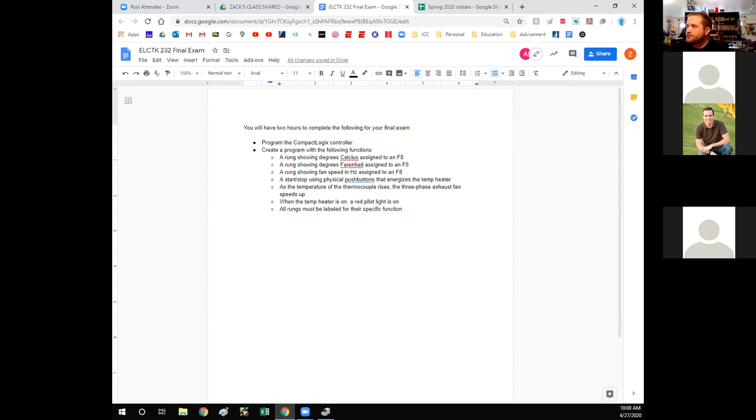Nothing technical wise. Do you have an idea of how we're going to schedule out when we're going to do the final exams though? No, I mean, I understand some of you are working, so I got to figure out which days we're doing it first, because I haven't heard when the official exam week starts. So I'll take into account if people have specific work schedules they need to work around, those people have first dibs. And then from there, we can either decide together or we can draw a name out of a hat. I don't really care.

And then we'll do it just like how we've been doing it in class, where you'll have control of my screen, and then I'll sit there and fall asleep while you're writing your stuff, and then you'll wake me up and say, okay, I'm done, and we'll try it out. And it's designed to have the same point value as if you had done all the labs. So that's what I'm going to base your grade on. If you accomplish X amount of tasks, then you get points for that amount. Okie dokie. And then the rest of your overall grade will be determined by your attendance and participation, all that jazz.

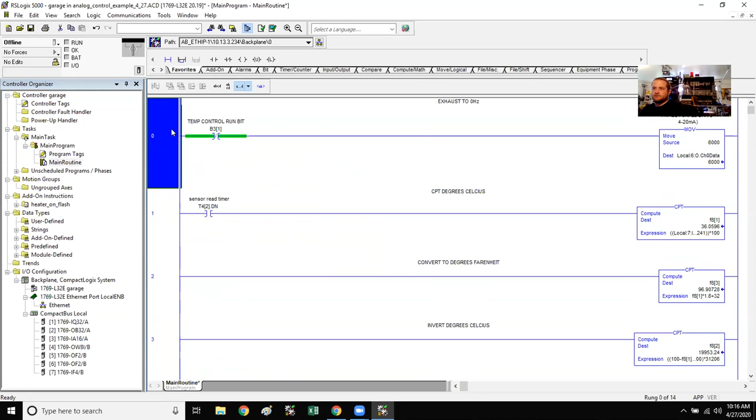Well, the first thing I need to do is I need to be able to control the pumps, right? So this processing can happen. So let's just use the selector switch for pumps 1 and 2. It seems like an easy thing to do. Say this is going to be selector left.

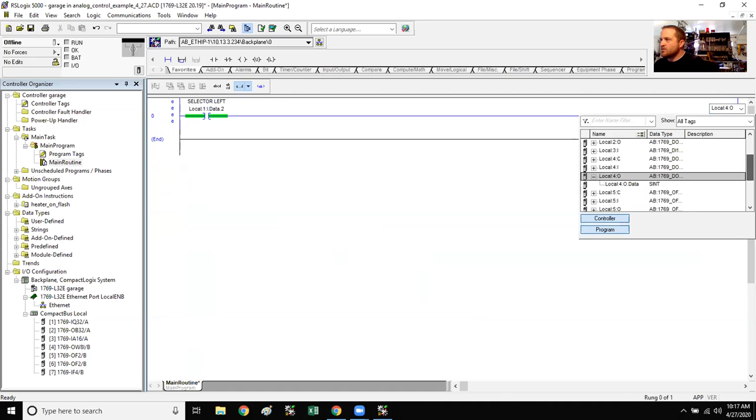And that's true. Left pump will energize for... selector right will energize right pump.

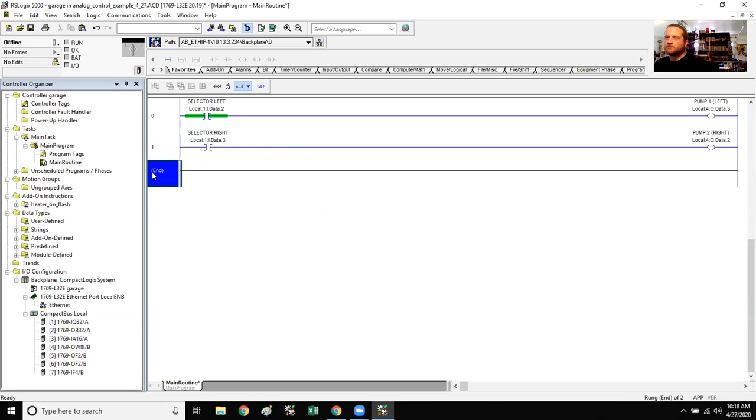All right, so we have a distance sensor, so we have an analog input. And as that number rises, we want the number for the analog output, which is going to be the 4 to 20 milliamp signal on the three-phase fan, to go up, right? So we're going to have a compute function.

And what other function are we going to need? What other type of instruction? Move. So what should we move? The value of the thermocouple.

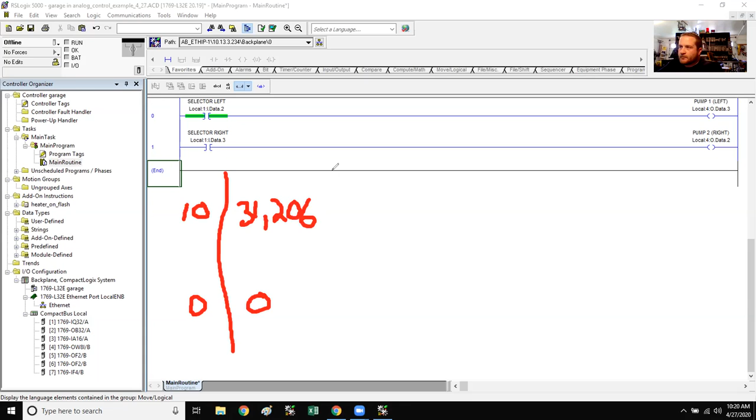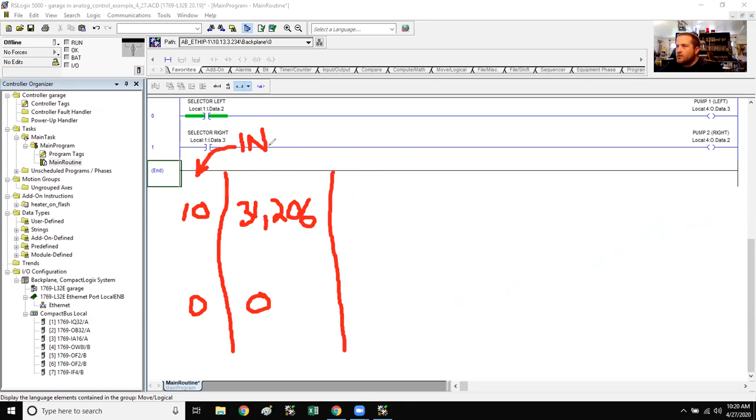What do we need to output to the VFD? 0 to 60 hertz signal? No. What is that drive looking for? A voltage? Nope. No, that's my two guesses, isn't it?

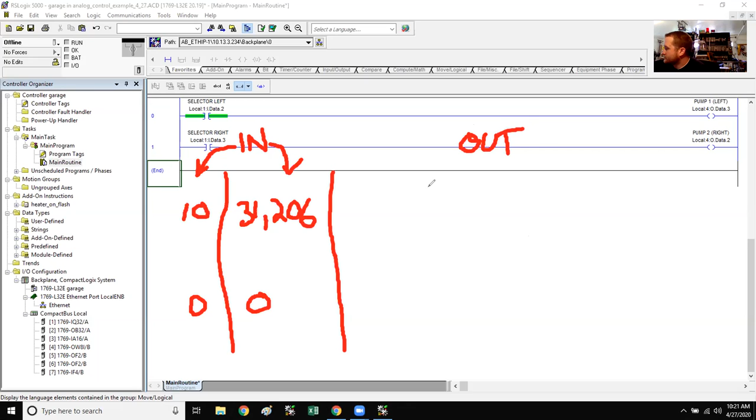6241 to 31206, you're right, but what is that? What is that PLC module going to send, signal-wise? Oh, 4 to 20 milliamps. 4 to 20 milliamps, we're going to output 4 to 20. Never mind, Jacob got it.

And those numbers are what? 31206 and 61, I don't know. And what? 6140, I'm pretty sure.

6241 to 31206, I believe. Yep. Is that right, Zach? Yeah, it is.

Okay, so that's what we need to do. Now we need to come up with the math to do it. So using this information, what instruction are we going to use?

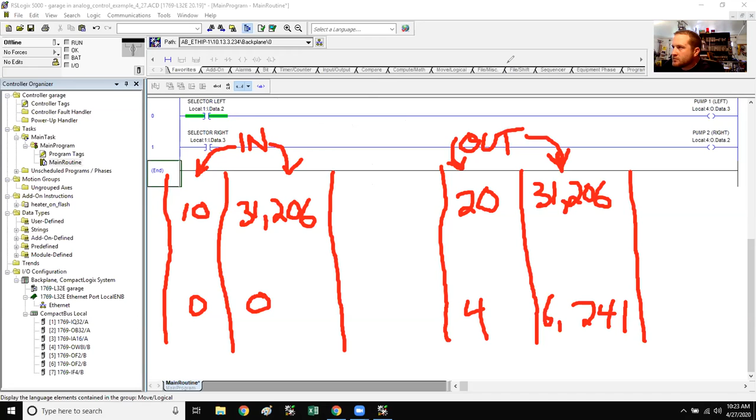Hey John, if you don't mind, could you mute yourself? Yeah, who's making all the noise? Tierney, how come you didn't mute it, kid?

Sorry, guys. You're good. So we're going to need a compute function. What are we going to compute? That's... I don't know.

4 to 20 milliamps into 6241 to 31206. You interpolate that so we can get that scale. We do need to interpolate. Yeah.

So we need to come up with a formula that's going to take one set of values and turn it into another set of values, right? Right. What's our first set of values?

We just had them written down. Is it the distance sensor? Yeah, the 0 to 31206. And the 6241 to 31206. Yeah, written down. It's just on another screen.

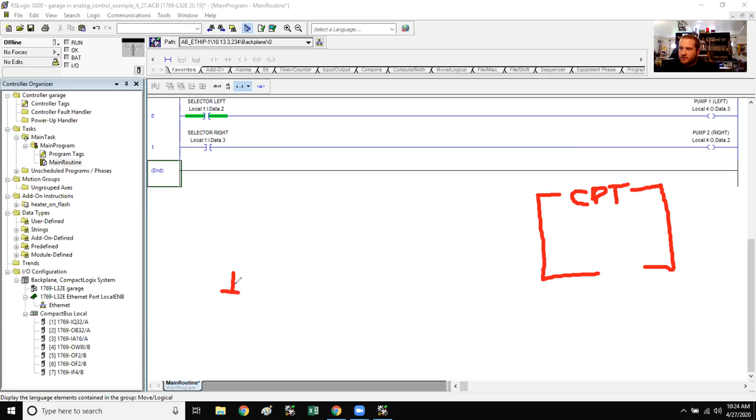All right, so if your input is a range between 0 and 31206, I'm just going to use the letter I to represent that. Whatever that distance sensor is reading is going to be this I, some number, right? What do we need to do with that number to turn it into a value that's...

31206 to 6241. Wouldn't it already be that number? No, because it's two different ranges. Oh, I'm so sorry, you were saying to go to the other one. You'd... let me look up the formula real quick.

Your input is going to be somewhere in here, right? Mm-hmm. We need to output somewhere in here. Are you looking for a simple answer, like interpolate, or are you looking for the formula? We need to interpolate it, yes, but we need a formula because we're going to have to put it into our compute function.

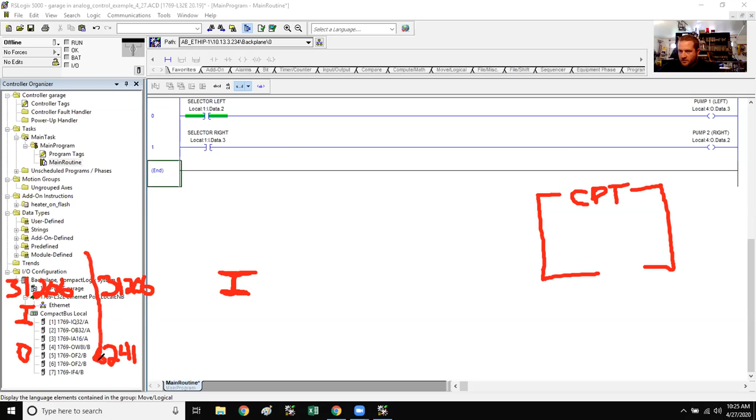So we'll take the distance sensor... well, yeah, you're already writing it down. So we'll subtract 31206 minus 0 and multiply that by whatever we're reading on the distance sensor.

Yeah, so basically we're going to take the first range, turn it into a percentage, and apply it to the second range, right? Yeah. So what is the percentage of the input going to be?

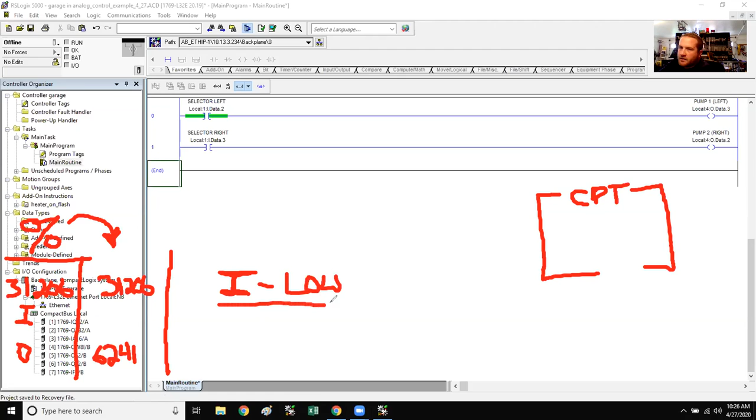Should we give you just a random number? No, just use the variable I for input. Oh yeah, the I minus the bottom number, divided by the high number minus the bottom number. Correct.

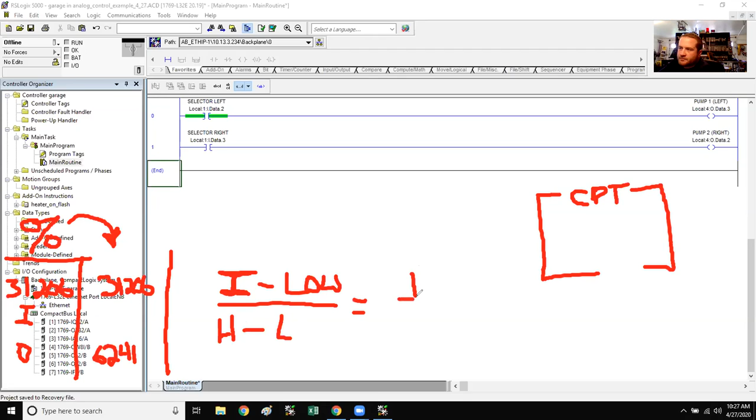Which ends up being just I divided by 31206. Right? Right. Yeah, so whatever that I would be, the distance sensor in this situation, divided by 31206.

That gives us a percentage. And we're going to apply it to the other range. So how do we do that?

Could you repeat that? I was writing stuff down. Well, remember, our whole goal here is to take this percentage of the first range and apply it to this range. So we have our percentage.

It's going to be the input divided by 31206. So how do we apply it to the second range? We would just add 6241 to whatever number we're getting. Eventually, yeah, but the first thing we do is multiply it times this range, right?

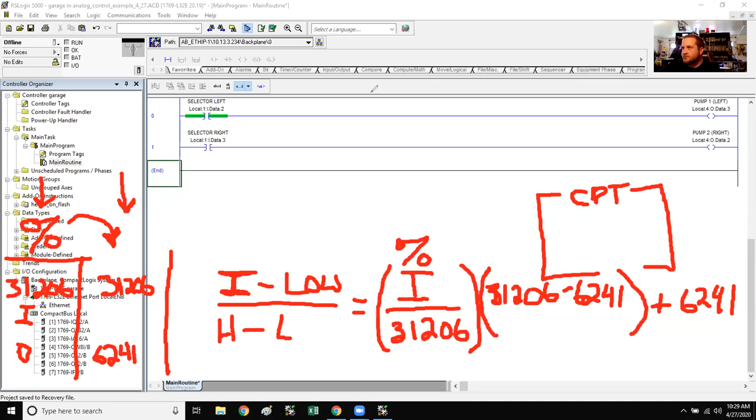Everybody get that? Mm-hmm. And then you just put that formula into the compute function, right? Yeah, and then set the destination to the F8. Yep, and then put that number into the variable frequency drive. Yep, exactly. Okay, so here's the formula.

And then we're going to take that number and assign it to an F8. We're going to take whatever that F8 is and move it to the output of the drive. Follow? Mm-hmm. Everybody good? Can I erase this?

Yes, going once. Yeah, I'm good. Would this also be... you can erase it still.

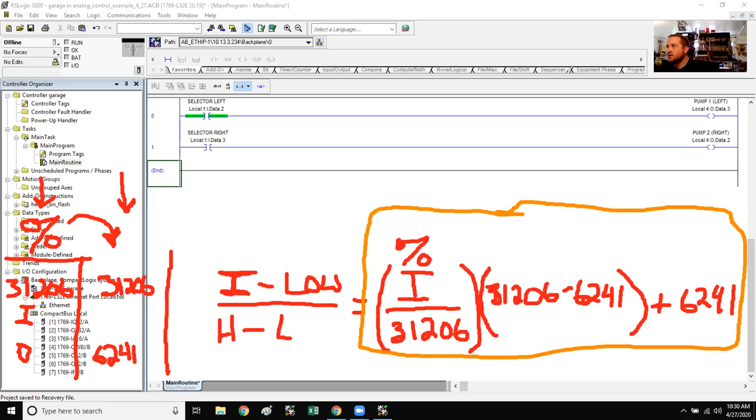Would this also be the same number that would apply to that F8 for the variable frequency drive? I'm not sure I understand your question. So for the final exam, it says a rung showing fan speed in hertz to an F8.

Would that be the same as what we just did?

No... oh, because I didn't need to interpolate that into hertz. That interpolation was for—think about it in the two ranges. Think about the interpolation as two ranges, right?

Okay, gotcha. Now this range, make it a percentage and apply it to this range. So if we were taking that signal from this range and applying it to this, what would this range be? This one, the end result, the fan speed.

This is 0 to 60, not 6241 to 31206. This would be 0 to 60. So no matter which two ranges it is, you're applying one as a percentage to the other. Correct.

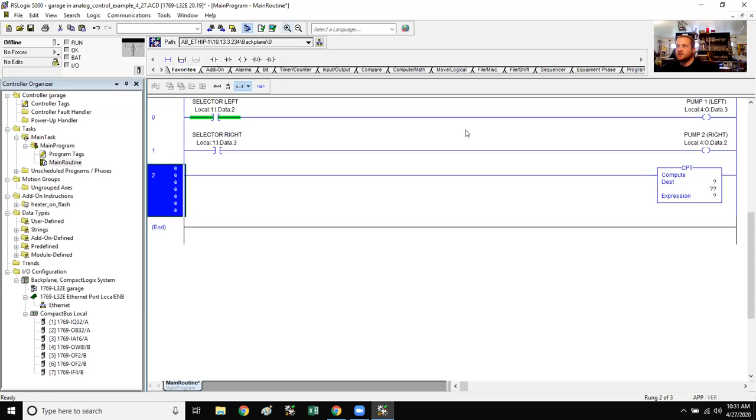Capiche? All right, so what am I doing with this compute function? Put in the destination—isn't that the VFD?

Now remember, this is where we're putting our formula. Let's put the formula in first. Okay, what is it? So our input... what's our input?

Not sure, let me look—was it one of the pumps? It was the distance sensor. Oh yeah, distance sensor, that's right. We changed it so we couldn't use it on the tester.

7.3? No, 7. 7.3—oh nope, 7.2, you're right, I'm wrong. So we're taking input channel 7.2 data and doing what with it?

Dividing it by 31,206. Then what? Wait a minute, time out—what does that give us? That gives us a percentage, sir. Very good, percentage. Now what?

Then you take—I don't remember the math, so we're going to put in the numbers—31206 minus 6241. Yeah, and then add 6241 after that expression.

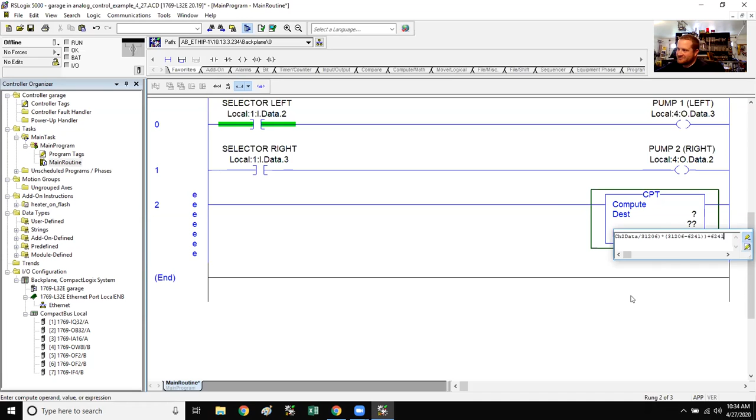I'm looking at a completely different formula on my screen, sir. I've got one that's like x2 minus x1 times y3 minus y1 over x3 minus x1. I guess plus y1 would work, yeah. I think it's the same—that's just interpolation. Yeah, that is.

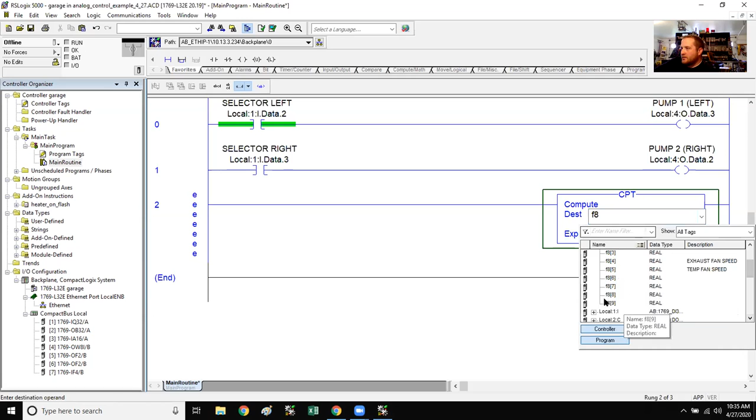And then the destination, wouldn't it be a float? Yep. I don't know what we got in here, I'm just going to pick one. F8. F88, just for this example.

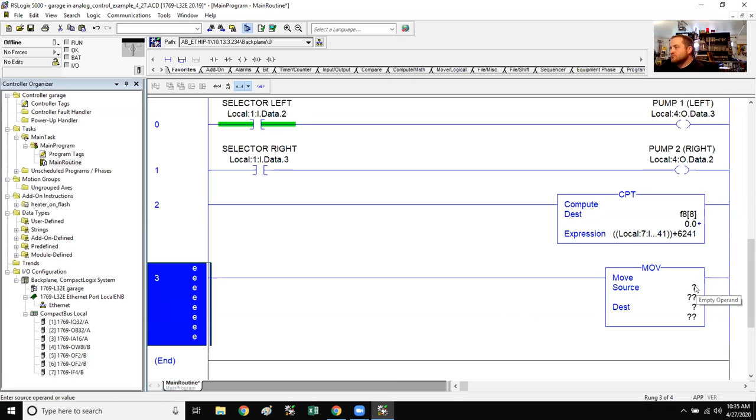Okay, and then I would—move function, then a move function, two move functions actually, but on separate rungs. We need one for the float number and one for 6,000 so we could shut it off. F88, yeah, F88 right there.

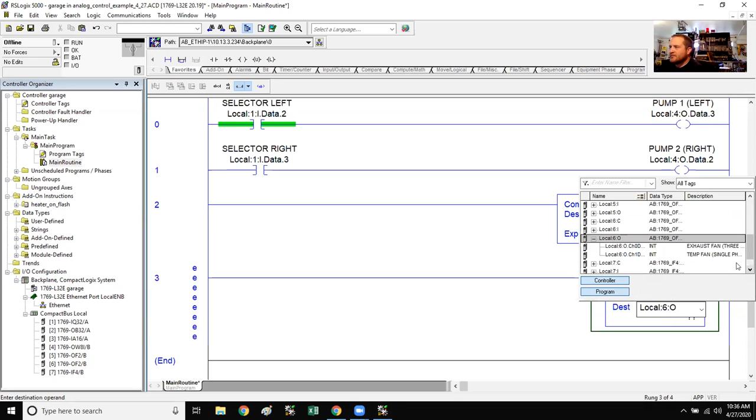Destination, my heart. No, channel 1, module 6, channel 1 will be the destination. Oh wow, you actually put my heart. Yep, Happy Valentine's Day. Thank you. Is that recent? I don't think it was. February, so no.

So if this is the case, if I make that water level rise, the temperature fan should go higher and higher. Now this all looks good to me.

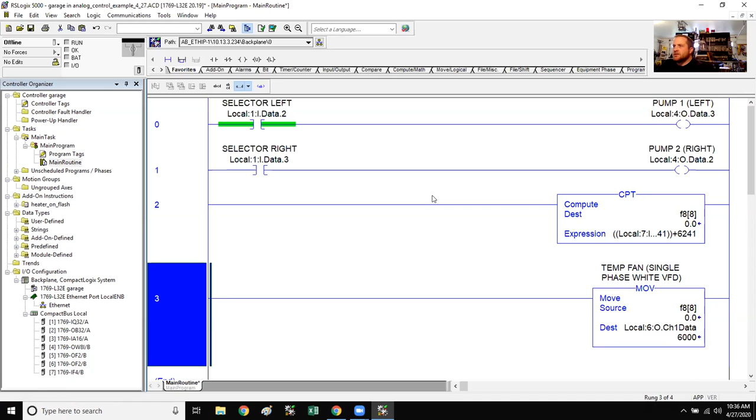The only other thing I'm going to add in here is that drive enable deal, the control bit. I don't know if you may or may not know what I'm doing—you don't need to know, but I'm just bypassing the drive enable. If you want to know, ask me later.

Shouldn't we also make a move function for 6,000? On the move function it already says 6,000. That's why I didn't ask—I didn't know if that was something you had to input.

Just a second, let me think about that. Oh, it's 2. No, no.

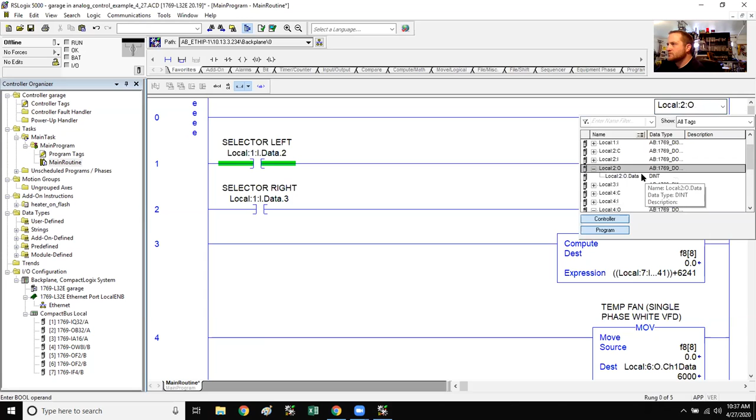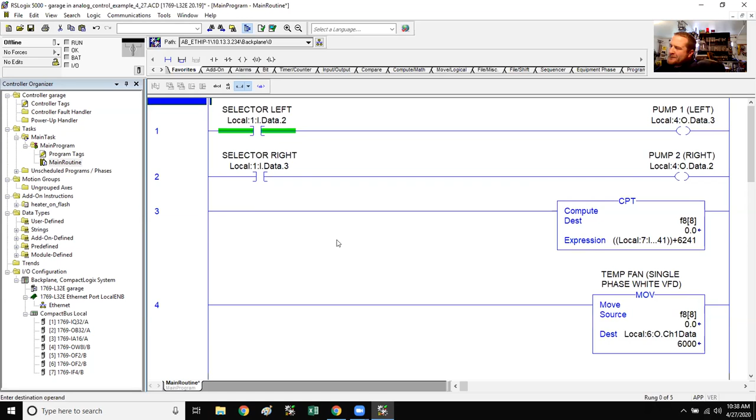So what do we want to do? We want to move the number 6,000 in there when we get a read on the distance sensor. I don't think we need that, because with this live updating, it's never going to be below 4 milliamps. We're never going to put anything below 4 milliamps on that drive with this running the way that it is.

Selector switch is off. Do you want to put a couple rungs in there that show what the distance is or what the height is, or do you want to just run it and see it work? Maybe we could do both.

Okay, you want to run it and see if it works? Then we'll put a couple rungs in there—one that shows hertz and one that shows level. Yeah, all right, that's a good example, that'd be a good example for the final. Let's run this and see if it works, and then we'll add those rungs.

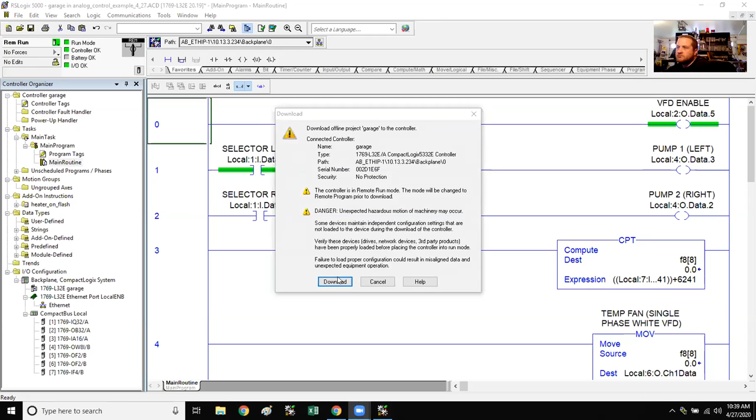So right now we're at 0 hertz, which means the level sensor must be all the way down. So I'm going to run the left pump with the selector switch. Can you guys see what's going on or no? We can, well, at least I can see. Okay. We should be putting up at the 0 level for the distance sensor. So if we did this right, you should start seeing that number go up.

And yep. So now the fan, I'm going to stop it, is at 18 hertz. Can you see the fan going? Yeah. All right, now I'm going to start raising the level of the water some more, and you should see that fan speed go up. I know you can't see the drive, but I'll just tell you 20, 25, 30, 35, 40, 45, 50, 55.

So that right there is at 58 hertz. You can see we're almost to that yellow line, which is the high value of that distance sensor. I'll just put it at 60. So that's full speed, right? And then if I run the right pump and start to empty that, you'll see the fan speed go down as well.

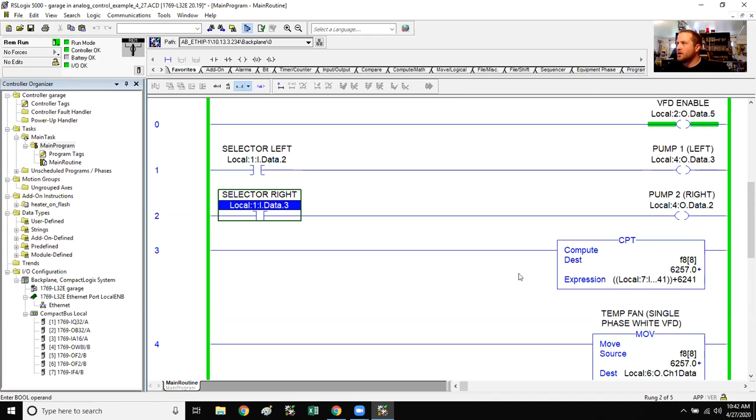All right. So what are we doing? We're adding some rungs. What do we want to show with these rungs? Wasn't one of the hertz on the VFD? Hertz on the drive and... don't know the other one. The level. All right. Yeah. Let's work on level first. We're going to interpolate. So what are our numbers for level?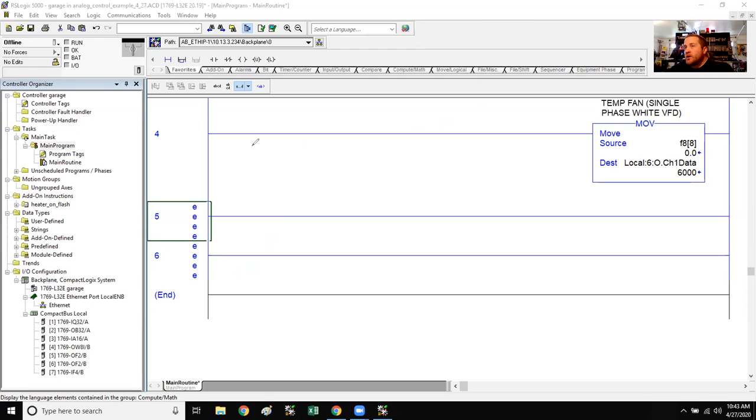It's crunch time. It's final exam stuff. Probably 4 to 20 milliamps. Well, what are we reading for the level? What's going to give us our level value? Is it the 6241 to 31206? Nope. So, it's the 0 to 31206, right. Okay, yeah. 0. I didn't know if it was 0 or 6,000. Yep. So think about it this way.

What on this trainer is going to give us the number we need? It's going to give us level. What's going to tell us what the level is? What component on here is going to tell us what the level of this tank is? The distance sensor. And this distance sensor happens to be, I mean, you could look up the information for this, but I'm telling you, it's a 0 to 10 volt. What's 0 to 10 volt?

Let's see, who is that? Jacob. Jacob, are you there? Yeah, I'm here. Can you mute yourself when you're not talking? Oh, yeah. I'm sorry, I forgot to mute it back up. Okay. I can do it for you. I just feel mean, like, I will mute you now. Right. No, if I ever forget to do that, just say something or just mute me. I'm on a job, so sometimes it's banging around. That's what I figured. Okay. Blue, black, purple.

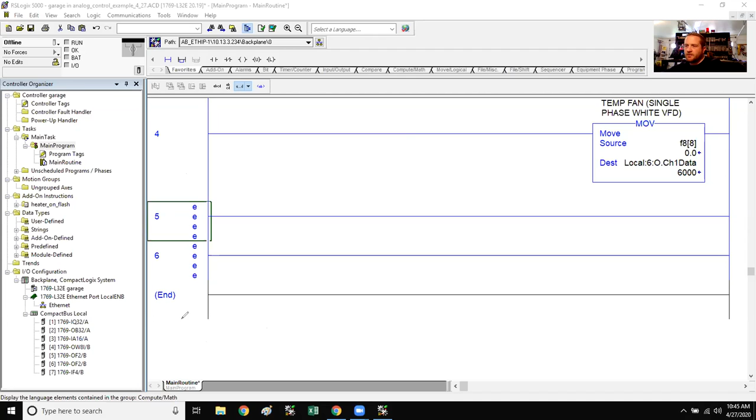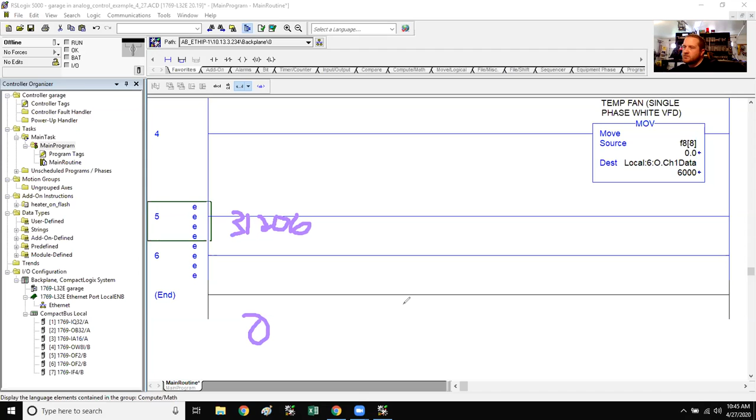All right. So we know that distance sensor is going to give us 0 to 31206. So that's our input. What's our output? 0 to 60. We're talking level now. Oh, so like a percentage, would it be? We're going to turn this into a percentage. Yeah, but I think he's questioning what our output would be if it's not 0 to 60. Because we don't have like inches. Oh, yeah, you're right. I need to measure that. Let's call it 2.5 inches. 0 to 2.5.

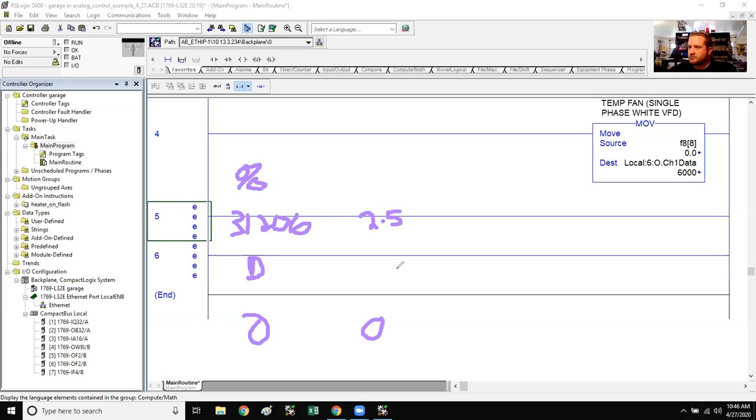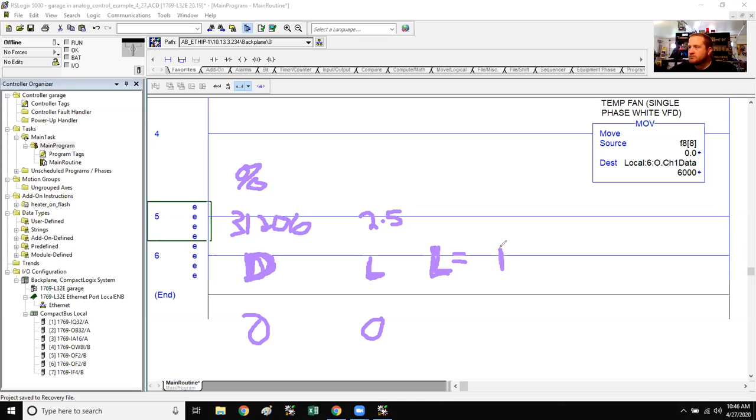So here's our distance sensor. And this is going to be level. So in order to get level, we've made it a formula. Level equals... So it'd be our distance number, whatever it is, divided by 31206. Yep. Divided by 31206. What does that give us? A percentage. Yep. Times 2.5. Times this range, which is just 2.5 minus 0, which is 2.5. And that's it because you're supposed to add 0. Right. Okay, so there's our level.

What would be our hertz? Would the range just be 0 to 60 on the hertz version? Yeah, it'd be the same. And aren't those the 31206 to 6241 on the VFD? Yes, but we're not worried about that. All we're trying to do is spit out a number between 0 and 60, right? So if we had this percentage and we're applying it to that range, instead of 2.5, it'd be 60. So level would be this, and then hertz would just be the same thing, distance divided by 31206.

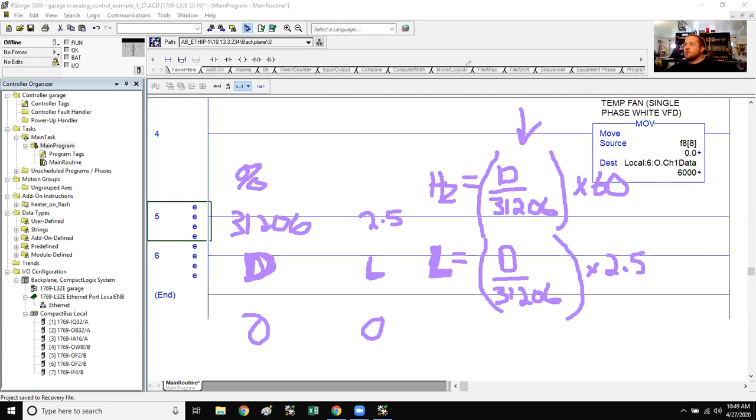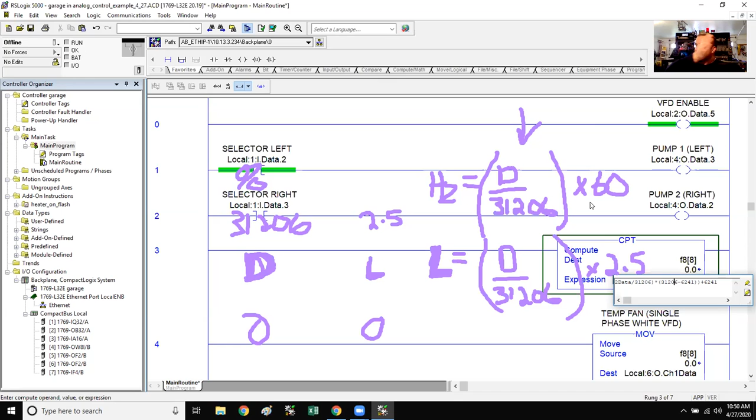For what was this? Whatever this one is. Distance divided by 31,206. So that's what the f8[8] would be, times 31,206. So if you had done that, you would take f8[8] times 31,206 minus 6241 plus 6241. See what I'm saying? There's more than one way to do it. You can break it down as many slices as you want, however you're comfortable with it. Okay? But for now, we'll do it how we just calculated it.

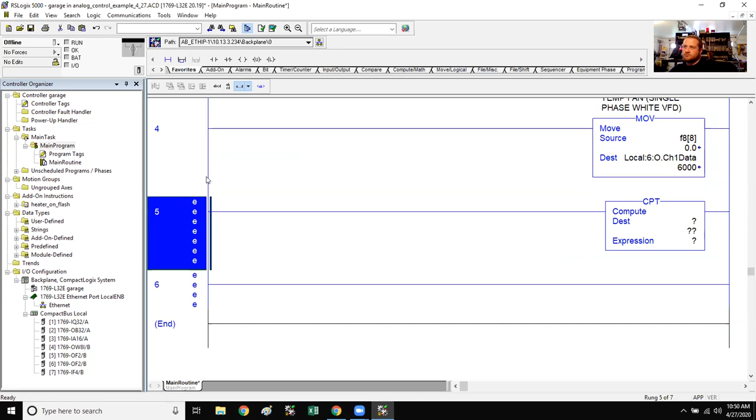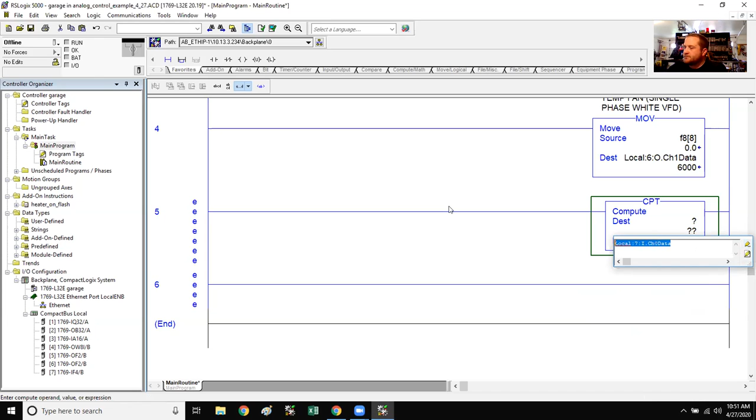So what was our first one? Use level. What's our formula? It was the 0 to 31,206. So it was our distance divided by 31,206. Times 2.5. 2.5 over 0. So distance sensor divided by 31,206. That gives us our percentage. And then what are we doing? Times 2.5. Yeah. Times 2.5.

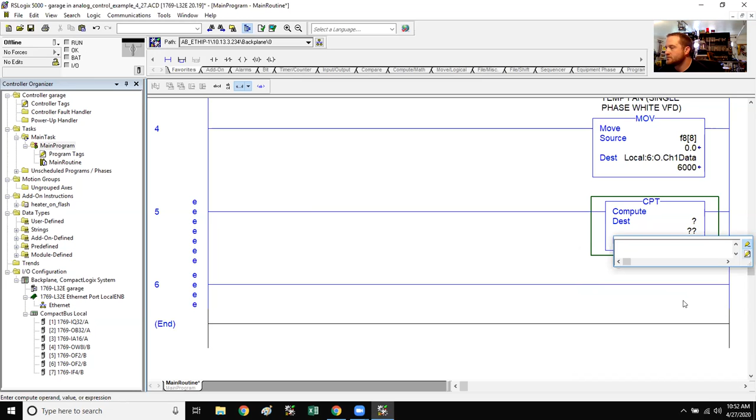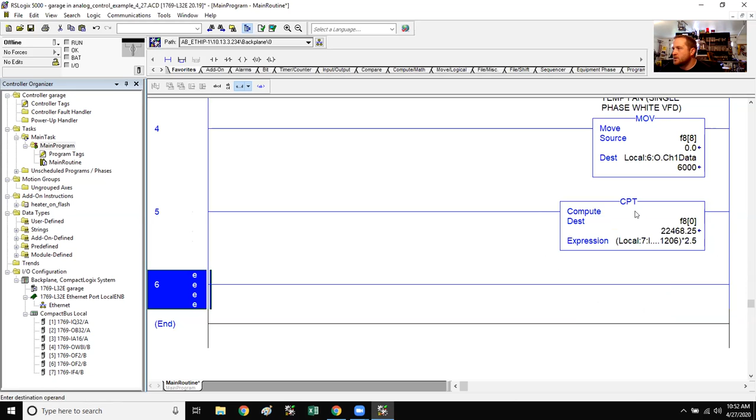What are we going to do with that number for the destination? Are we trying to read it on? No, we just want to keep it in a float. Yeah, that's all we're doing is displaying. We're using this rung to display what it is. So here, which float it is. I'm going to call it F8[0]. And I'll just label this level in inches.

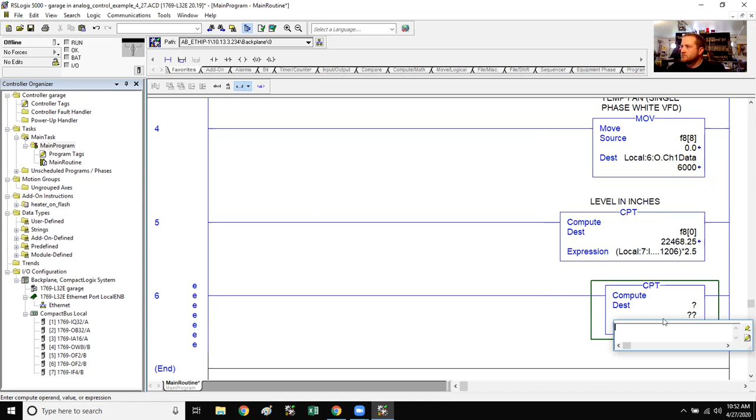And then what? Now we're going to find speed in hertz. So that same formula, but times 60. Correct. The easiest thing to do here would be if we had a separate float. Copy that, paste it here. We'll make this F8[1]. This formula, then all we have to do is change this to times 60, right?

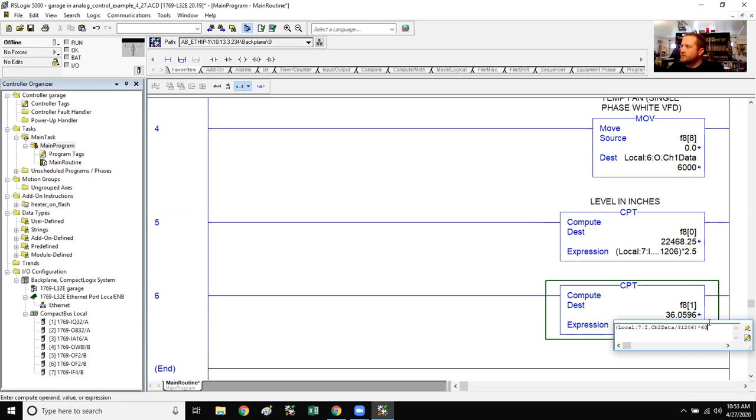Does the temperature sensor have the same 0 to 5 volts, 0 to 31,206? Nope. What is the temperature sensor? What kind of signal is the temperature sensor putting onto the VFD? Oh, 0 to 10 volts. Nope. Oh, 4 to 20 milliamps. Sorry. Yeah.

So the temperature sensor, this thermocouple goes to that puck, and that puck takes that signal. So a thermocouple uses a difference of voltage, right? Yeah, between two dissimilar metals. That puck will take that signal and turn it to a 4 to 20 milliamp signal, depending on if it's 0 to 100 degrees Celsius, just for that puck.

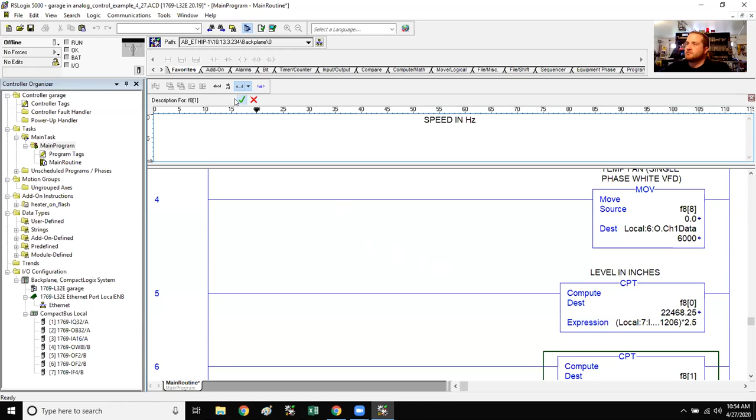What am I doing? Oh, speed in hertz. All right, so if we did this right, this should show F8[0], the level in inches, and this should show the speed in hertz. Should we try it? Yeah.

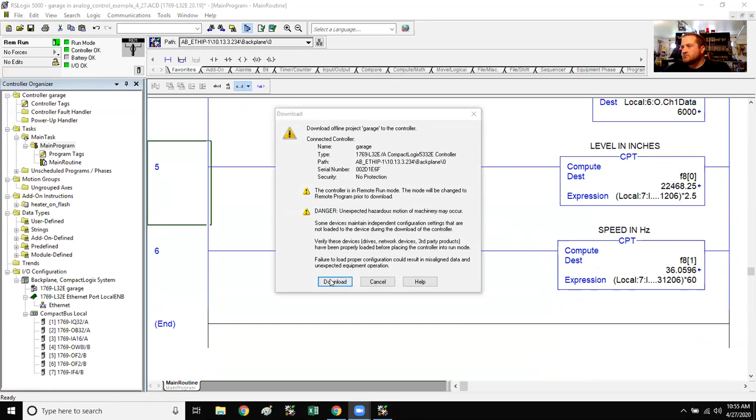Follow-up question. Is everything that's 4 to 20 milliamps going to be the 6241 to 31206? I have it in my notes. 31206. Perfect. I want to answer that question. What do you think? I think yes, because I don't have it in my notes. The only thing I have in my notes is that 0 to 5 and 0 to 31206. So I'm assuming anything that starts with 0 will be 0 to 31206, and anything that starts with 4 will be the 6241 to 31206.

Let me answer your question this way. You're probably right, but if you wanted to double check that, where would you look? How would you find that information? That is the question I think I am asking. Would I go to the tags? Yes, and then Google those cards. It's 1769. It's all in the Rockwell user manuals, every bit of it. So go on your tags, and for instance, I think one of them's like 1769-OF2. Google that, and if it's an analog signal, it'll give you the reading.

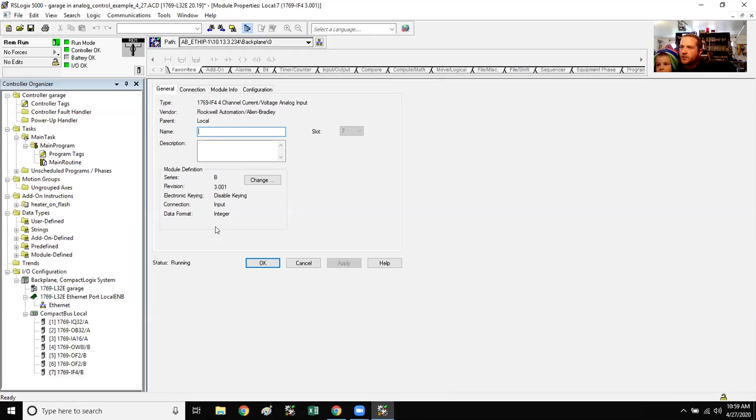So that module that I just held in front of you is this 1769 IF4. So I'm going to open that up. You remember this screen where we disabled the keying, and then over here in configuration, we told it, look, channel 2, that's a distance sensor. This is going to give you 0 to 10 volts.

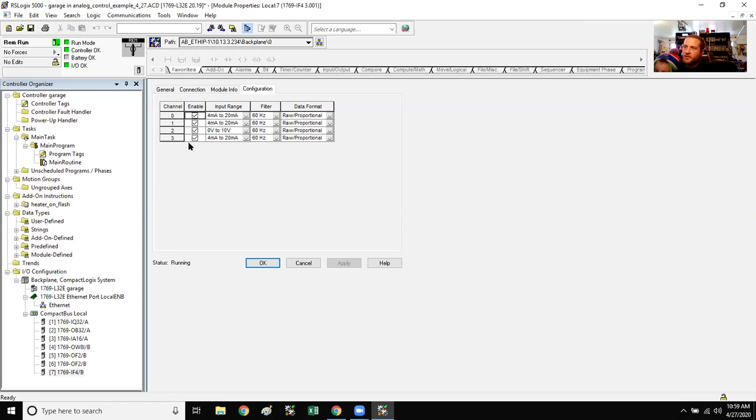And we told the temperature, we told it, all right, channel 3, I've landed a temperature sensor. It's going to give you 4 to 20 milliamps. So we told it that. And then it's going to say, okay, thank you for that 0 to 10 volts. Here's a number for you. It's going to be between 0 and 31206. Make sense? Yep. All right.

We got this thing running. It looks to me like it's working. We'll just double check. Right now, the speed is basically 0. The level is basically 0. And we will make level go up. So I'm going to turn pump 1, left pump, on. And you should see the level in inches start to go up. And you should see the speed in hertz start to go up.

So I'm going to stop it around 1 inch. So I'm around 1 inch, and the speed of the fan is 27 hertz. And that's pretty spot on. 27.7 is what the drive is showing. Huh? That one what?

We're gonna make the water go from there into there. You ready? Yep. Okay, and now I'm gonna keep going with the level. And we're at 1.5 inches. I'll stop it at 2 inches. 2 inches, and the speed of the fan is at 50 hertz. Cool? Cool.

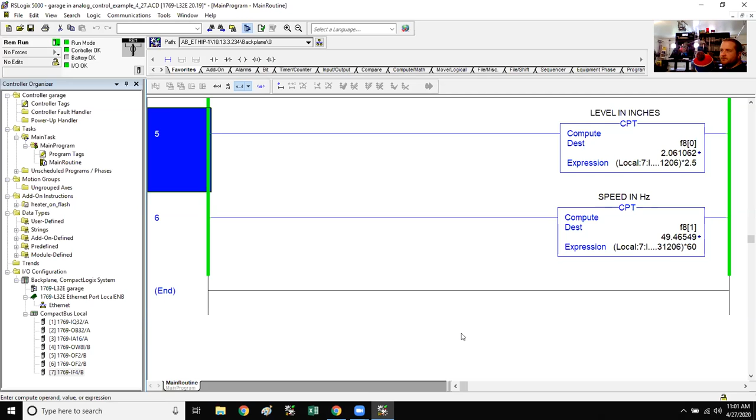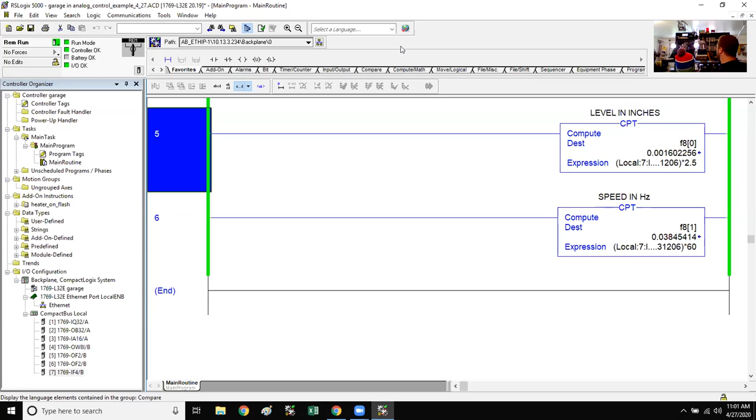All right. Cool. Didn't even get into the HMIs, and I even set up this fancy schmancy... I'm gonna turn this fan off here. We didn't even get into the HMI to finish that up, but it makes me sad because I set up this really, some of you saw at the beginning. I did that just for you guys, and I didn't even get to use it. Looks great. Maybe we'll do that Wednesday.

That'd be cool. After our quiz. Yeah, isn't the quiz Wednesday? Quiz Wednesday. Yeah, but the quiz will take... You sure you want to? You want to answer that? Nathan, put yourself on the spot. Nope. How long will it take? I shut up for a reason. How long is that gonna take, Nathan? Oh, you're just funny. All right.